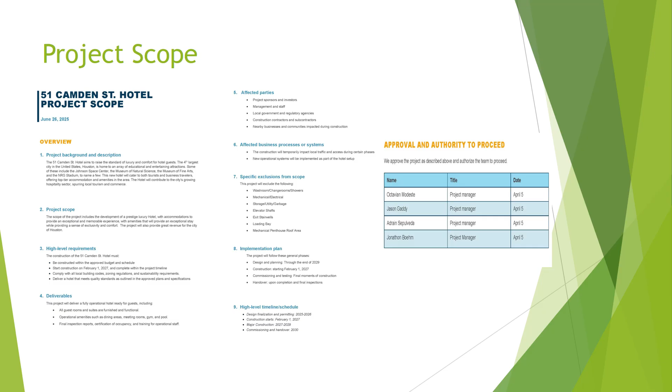And the project managers on this will be Octavian Modeste, Jason Gaddy, myself, Adrian Sepulveda, and Jonathon Boehm.

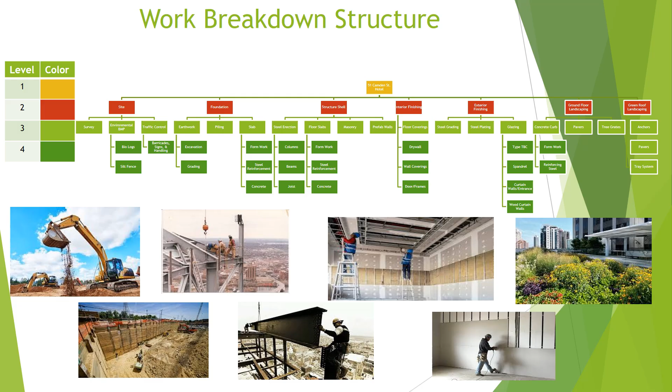Our WBS represents 4 levels of work elements that aided in the development of our schedule. Level 1 encompassed the work package. Level 2 identifies major elements. Level 3 consists of sub-elements of the major elements. Level 4 introduces the actual work activities associated in Level 3.

On our current slide is an enlarged version of our WBS. For site level, we have survey, environmental BMPs, and traffic control. Under our environmental BMP, we have biologs and silt fence. These are both to aid in the control of sediments running off the job site. Under traffic control, the barricades provide a safe environment for pedestrians and vehicles traveling nearby the job site.

Our next level is foundation. Under foundation, we have earthwork, piling, and slabs. Under earthwork, we have excavation, which involves excavating for the basement floors and grading of the site. Under the slab, we have forms, steel reinforcement, and concrete. This is to provide a solid base for our structure.

Which brings us to level 2, our structural shell. Steel erection, floor slabs, and masonry, along with prefab walls, are all on this level. Our steel erection consists of columns, beams, and joists. Our floor slabs consist of formwork, steel reinforcement, and concrete.

As you can see, the WBS can be quite lengthy. Here's the other half of our structure. We have an interior finishing level, an exterior finishing level, ground floor landscaping, and green roof landscaping.

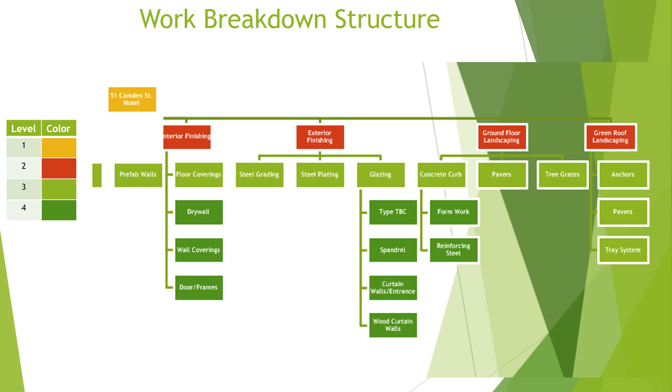Moving on to the ground floor landscape, we have concrete curb, pavers, and tree grates. The concrete curb is going to consist of formwork and reinforcing steel. Moving on to the green roof landscaping, it's going to consist of anchors, which hold the handrail in place, pavers, and a tray system developed to enhance landscaping.

As mentioned before, the WBS aided in building our cost package. Here, we used data that we gathered from the plan set. We also used data from RS Means. Our national average cost for construction of a 5-star hotel consists of $441 per square foot. We added a city unit cost of $3 per square foot for the Houston area. And we multiplied that by 85,223 square feet.

This total came out to $37,839,012.

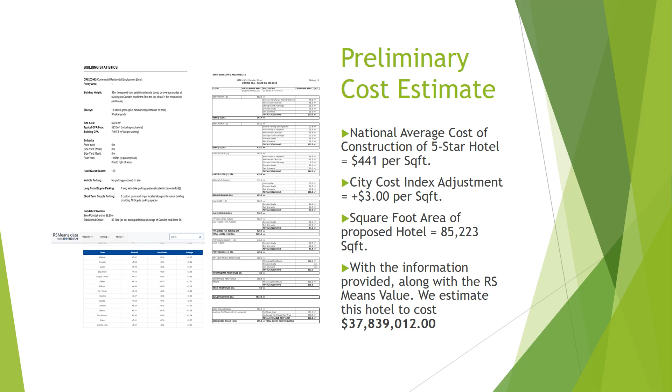Hi, my name is Jason Gaddy. I'm going to discuss our construction schedule and how we developed it.

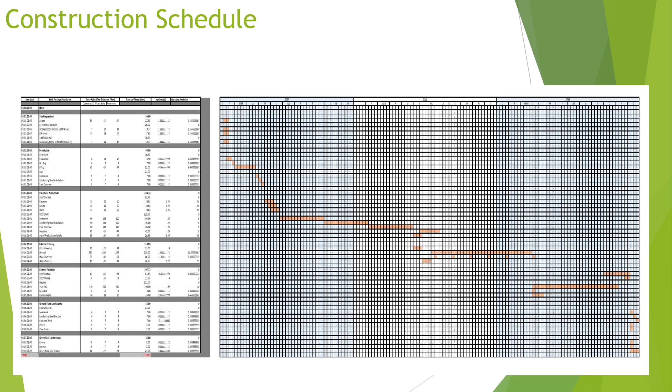First, each work element from the work breakdown structure was assigned an item code, which has corresponding codes that designate them as sub-elements of other codes. At this time, a construction schedule was developed based on these work packages, which assumes a constant duration for each work package. This is done in order to determine which work packages cannot be done until a previous one has been completed.

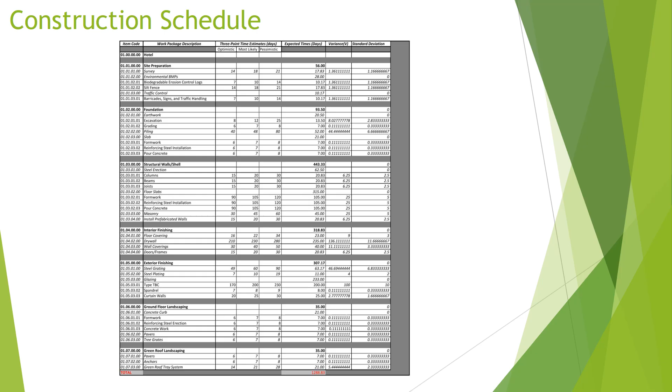Using this information and the new work breakdown structure, we were able to develop a preliminary work schedule. We will speak on the 3-point estimates and time estimates, and how they were determined, on a later slide. But for now, under the column named expected times, we have the time durations used to generate the overall time schedule.

Here you can see the beginning of the work schedule, which starts in February 2027. This begins with certain pre-construction site activities like surveying the site and preparing environmental and traffic controls. Before this is completed, excavation of the foundation begins. You can see that there's an overlap within February of 2027.

Upon completion of the excavation, grading begins, and any sub-foundation elements such as piling will be installed. From there, the foundation slab will be constructed, and by the end of the first year, the structural shell of the building, which includes columns, beams, and joist steel erection, is about halfway completed.

This steel erection process is completed and repeated for 15 more floors. After the foundation and 15 more floor slabs have been constructed, installation of prefabricated walls begins.

About halfway through the second year, the interior finishing packages begin. You can see that some of this work is able to be overlapped with other work, while some cannot begin until a previous package has been completed.

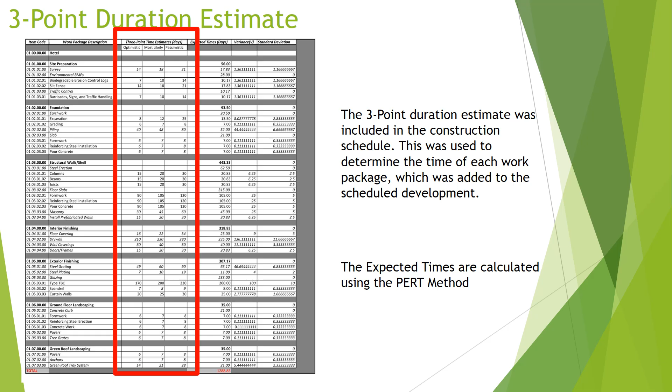This is Adrian Sepulveda. As Jason said, I'll be going over the feasibility analysis. This analysis will basically explain how much the hotel should make and compare to the total cost to see how long until this project breaks even in profit. Most of this cost information comes from the RS Means value, which we previously explained in the preliminary costs.

With the annual revenue out of the way, now we have to take the operating costs along with the preliminary costs, which we previously covered, into account. The operating costs can range from $3,150,000 to $5 million, making the estimated annual profit anywhere from $6,843,520 to $8,693,520. With this in mind, the estimated time that it will take for this project to break even will be around 4.4 to 5.5 years.

With this project, we are providing multiple positive impacts to the community of Houston. These positive impacts include adding accommodations in the city of Houston. If somebody needs a place to stay, they can come to the hotel, rent a room, and have food and shelter provided right there in Houston.

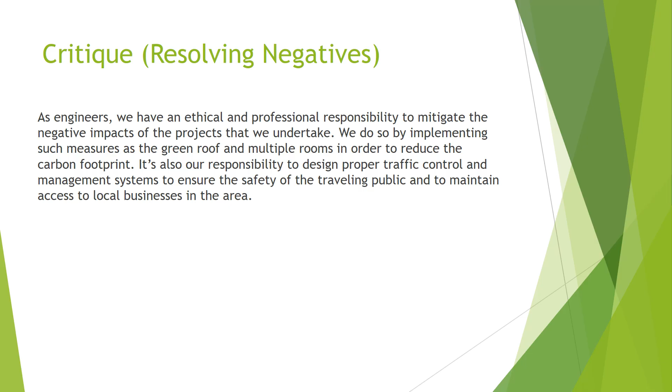It's also a responsibility to design proper traffic control and management systems to ensure the safety of the traveling public and to maintain access to places such as local businesses in the area.